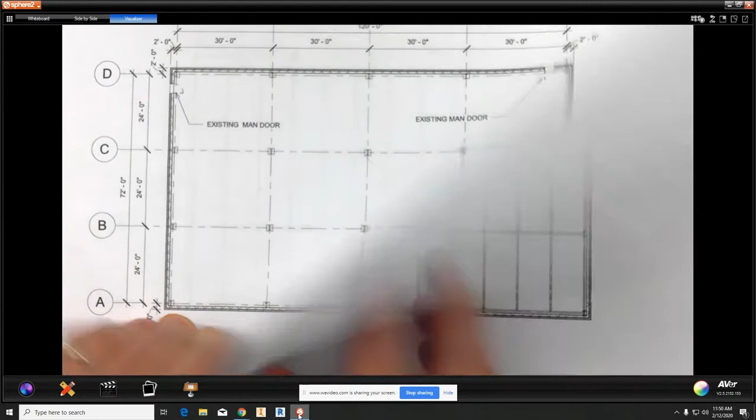We are going to start the process of doing our initial layout for our library right now. So I have two sheets of paper here. I have the first floor framing plan, first floor plan, and then I have the second floor plan. All right.

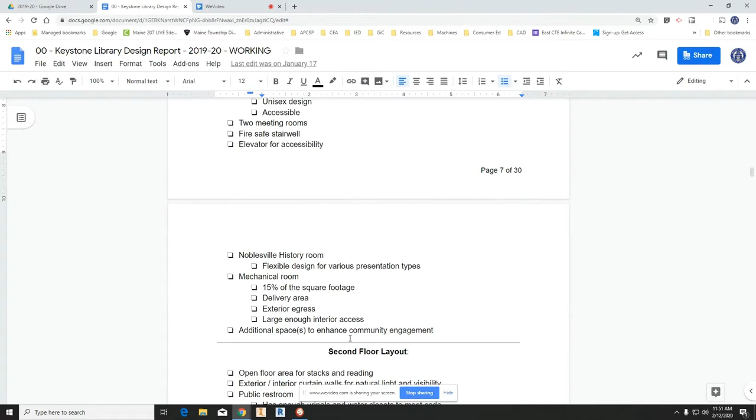So for the first floor, if you look at the requirements in the document that I gave to you, these are all the requirements that our first floor must have. Entry vestibule, main circulation desk, children help desk, exterior curtain walls, public area, public restrooms, library and office, so on and so forth, down to mechanical space and additional space for community engagement. All right, and the second floor also has some stuff here.

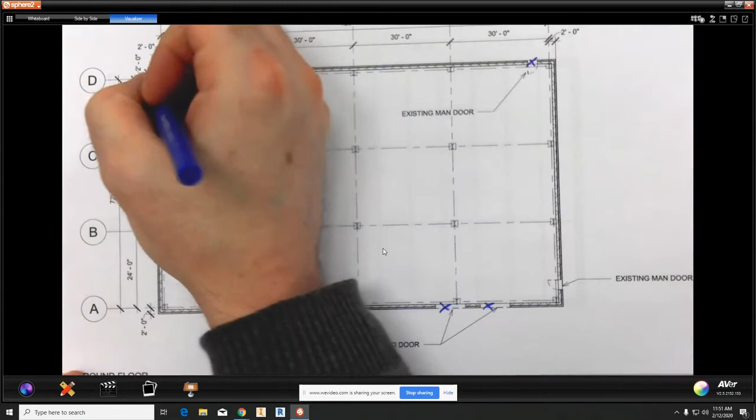So what I'm going to do is I'm going to sketch this out. So a few things that I've already designed with you: first of all, I'm getting rid of the existing doorways. I'm going to put in my own doorways. I put in an entry vestibule. I can't remember exactly where it is, but I'm going to kind of just sketch it out, maybe here-ish.

So that's my entry. The reason being is this is the south side of the building. Most of the sun, especially in the winter and when it's colder, is on the south side. So this is why my entryway is down here. I'm going to have a lot of glass along the east, south, and west sides. The north side, not as much. Another thing I've done so far, I made this area here my stair and elevator. Okay.

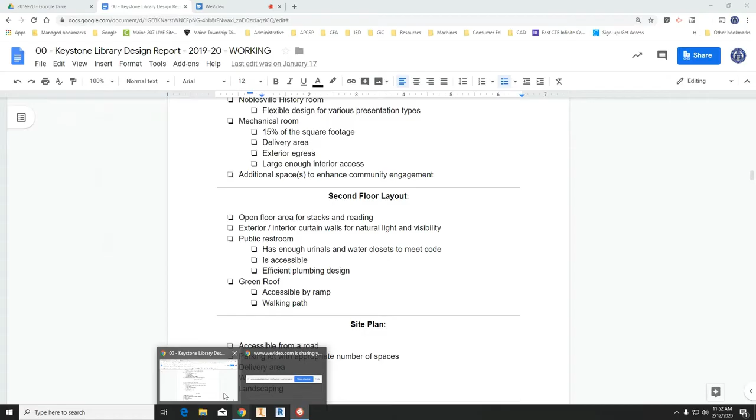After that, I'll split the screen so we can kind of see two things at once. So here, 15% of the overall square footage needs to be dedicated to the maintenance room, mechanical room. The overall square footage is 120 by 72. So 120 times 72 is 8,640. Remember, there's two floors, so times 2. We get 17,280 square feet. 15% of that is about 2,592. Let's say roughly 2,600 square feet.

If I divide that by 30, because that's kind of the length of one of these, it needs to be about 86 feet long. So if it's one of these wide, it needs to be 86 feet long. This is pretty excessive, but if I look up here at one of my requirements, it says multiply by 2 with a green roof. I'm not going to do that. I'm only going to multiply by 1.5 because I'm only going to take into consideration the second floor that's enclosed.

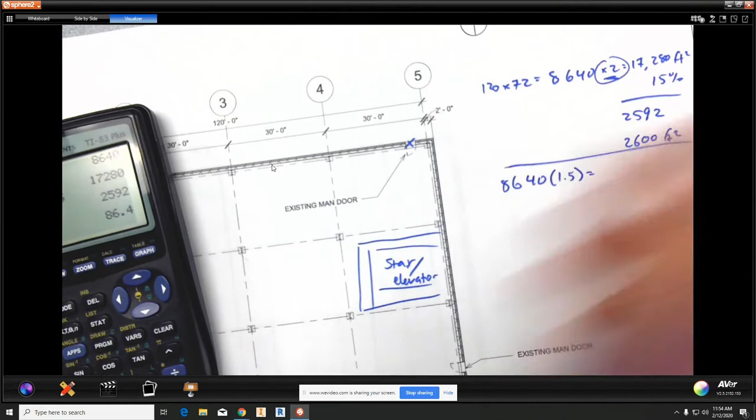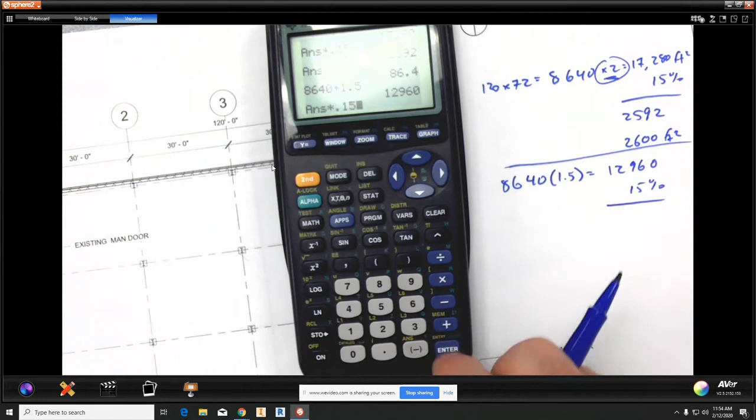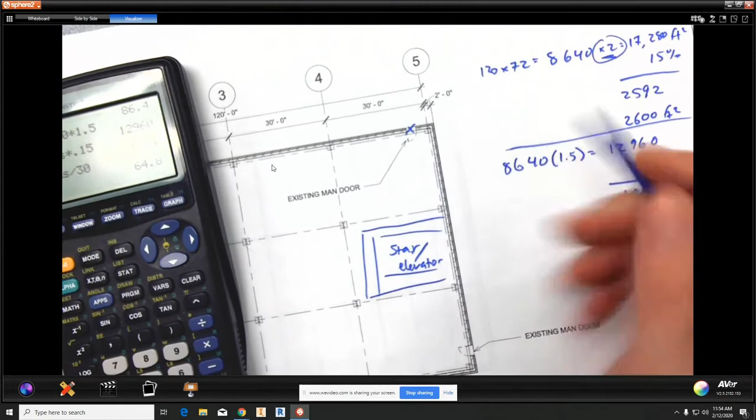So if I go back to the 8,640 times 1.5 this time, that's 12,960. Multiply that by 15%, I get roughly 1,900 square feet. So with 1,900, divide that by 30, and I roughly get about 64 feet. So this is still a pretty large mechanical room, maintenance room. I'll double check my numbers here. I did say 15%.

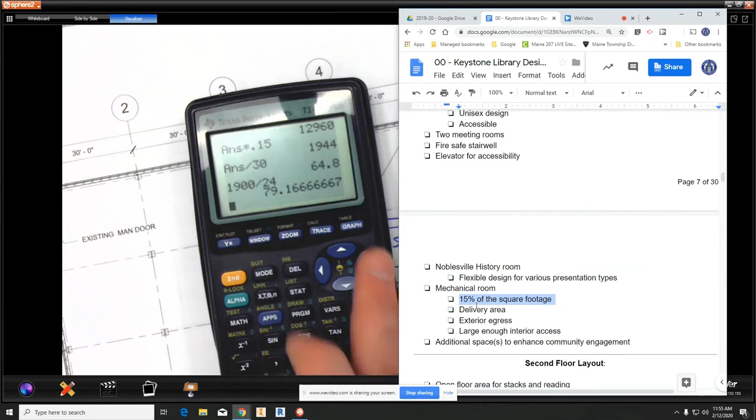And you do need a pretty large mechanical room. Let's do 1,900 divided by 24. Let's see how that works out. So that's 79. So I'm going to maybe cheat a little bit. I'm going to dedicate these 2 bays here to mechanical. And that way, in the back here, I can have a garage door and some walking doors. I'll put that over here because I'll have the parking lot around here. So entry door. And that way it's also next to my stairwell.

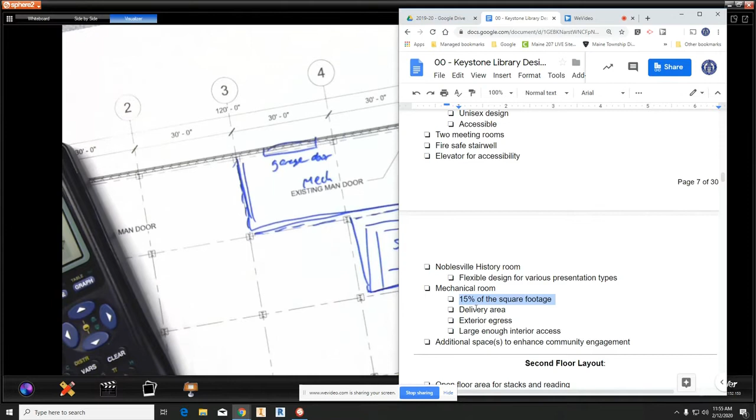So that's all. Let me go back here. So I'll roughly keep this upper corner here all for essentially mechanical and stuff like that. And from here, I'm going to start putting in my other spaces. So if I go back here, let's see. Entry, so the main circulation desk, I'm going to put that most likely right around this area. So this would be my circulation desk.

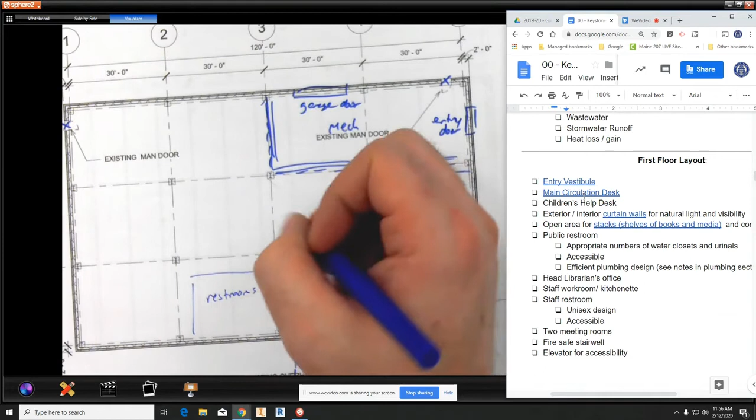Off to the left here of the entryway, that's where I think would be a good public restroom. I'm not really sure how big to size that just yet, but I'm going to roughly do something like this, and we're going to call that restrooms. Let's see, so flow of traffic: people come in here, circulation desk out here, kind of an open space. This would be maybe the shelf books / tables.

All right. Children's help desk. Not sure if I want that on the other side of the restroom, or maybe back here is what I'm thinking. So we'll put the children's area back here.

Again, this is all just rough sketching out. Let's see. So the open area maybe could be in front here. So let's kind of dedicate this to open area. And then the west side, the left side here, is where I'm going to have a lot of my meeting rooms and

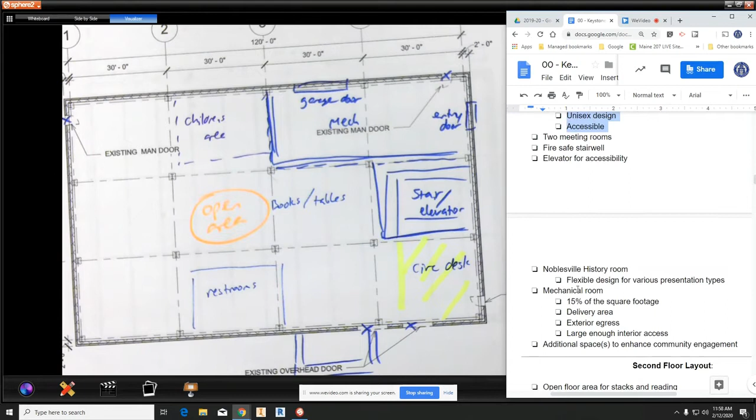so let's see, things I haven't done yet. I've done that. Open area, public restroom, I've done that. So librarian's office, staff workroom, kitchenette. I kind of want this all to be in the same place. We need some meeting rooms, history room. So that's kind of all I need left, and I've got a decent amount of space here.

So I'm thinking we'll put the office space here. So I'll dedicate maybe this whole bay here to staff area and head librarian area. Okay. And then let's see, maybe this bay here would be the history room. And then let's see, what else do I need?

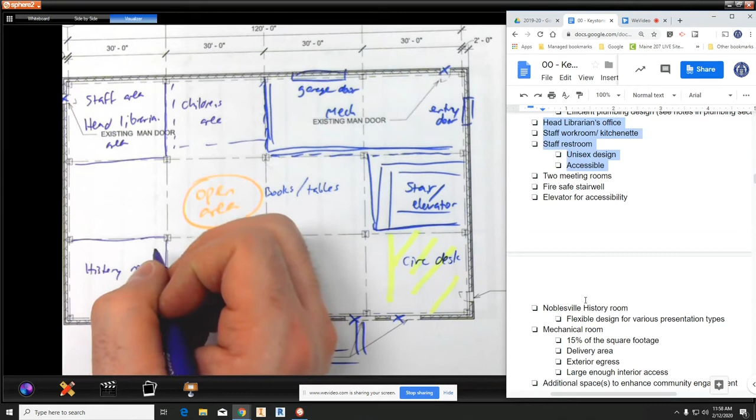So I've got meeting rooms and additional space for community engagement. So yeah, maybe meeting rooms. And maybe I can somehow incorporate, along with this open area, possibly flex type space. So maybe a place where there could be displays set up, similar to the history room, but maybe like a maker space or something to draw the community in. All right, so that would be my first floor, and then going up to the second floor.

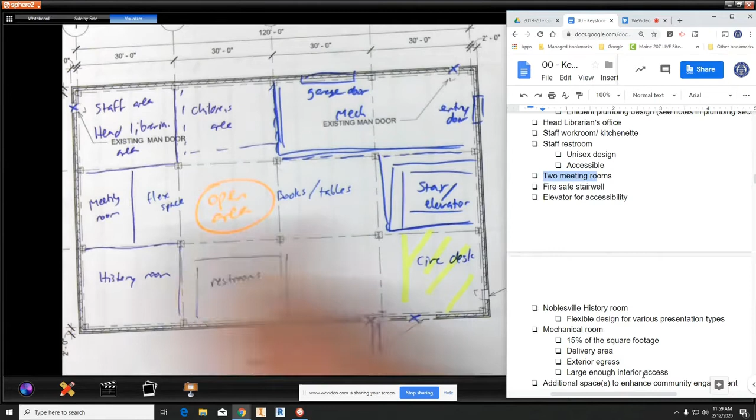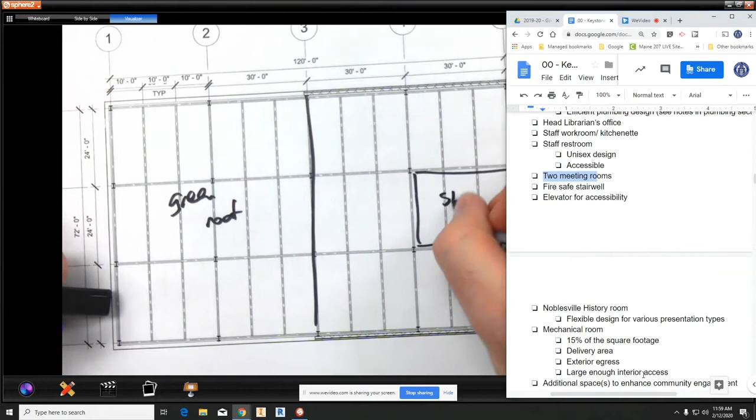So if you're looking at the second floor, right away you can just grab another marker here, kind of chop this off here. This is green roof. To connect this part down to the bottom, this is your stairwell, an elevator. All right. And so once you walk out here, it's useful and economical to have the plumbing from the first floor and second floor be in the same place. So it might be good to have this as a restroom area.

Keep most of this area here. As soon as you walk out of the stairwell, open, and then stacks of books and tables. Let's see, what else do we need on the second floor? So open area, exit. Don't forget you're going to need entrances or ways to get to the green roof. So you're going to need doors, maybe one there and there. Green roof access, that's what that is.

Public restroom. And then these two areas here, relatively secluded. Maybe you could have additional. There's extra flexibility here. You have study area maybe, or private meeting rooms, so more meeting spaces or study areas, like a multimedia place, or again places that are flexible to try to draw more of the community in.

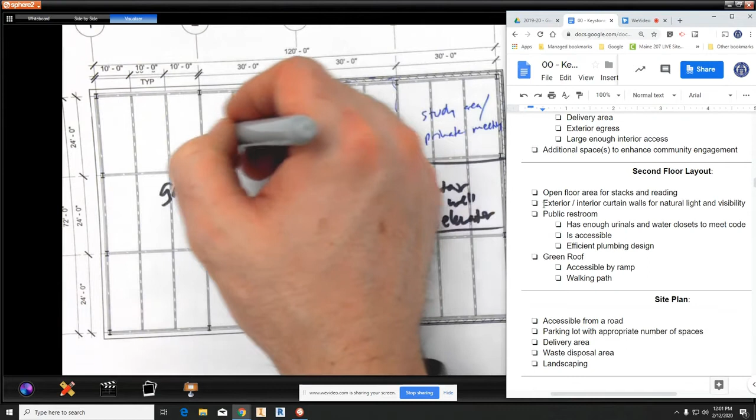All right, so that's kind of how I would start the process of sketching out what my area is going to be, and then another thing you can do is maybe start thinking about how you want your walking path to be. So if your doors are here, your walking path could meander. I'm not sure if I did that right. Yeah, and so that could be a walking path, benches, trees, and bushes.

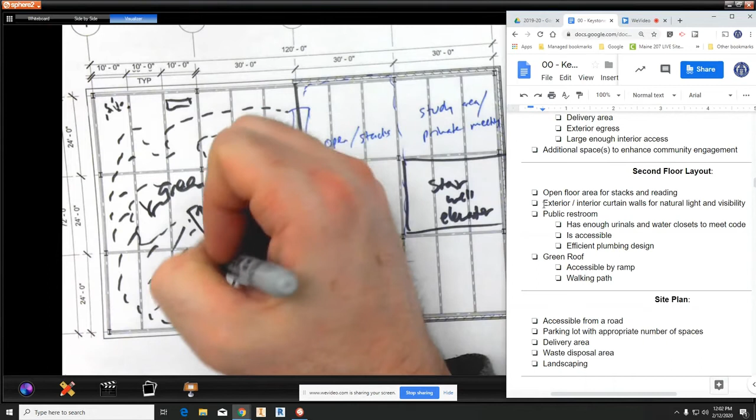But you kind of want to just think through what you're going to want, like a bench here at the end of a little area, and then just trees, bushes, things to draw people into the space. All right, so it's a good start. After this, we're going to switch over to Revit, start sketching out with interior walls, and see how it goes from there.

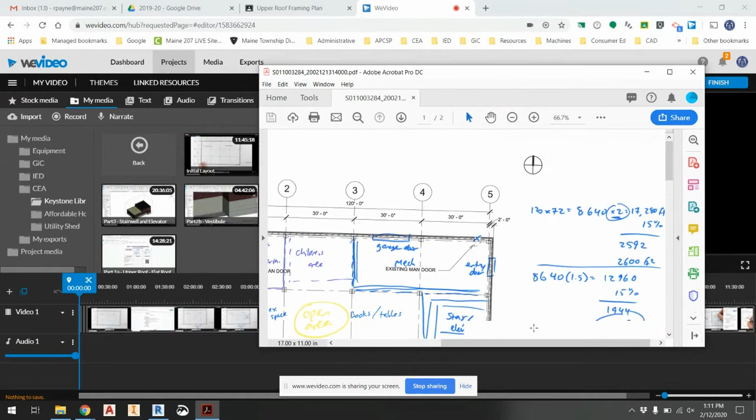Here's the sketch we just did for the first floor. Here's the sketch for the second floor. Now we're going to start the process of putting this into Revit. So I'm going to push this off to the side of my screen, maybe zoom in a little bit. All right, so zoom in here and go to Revit.

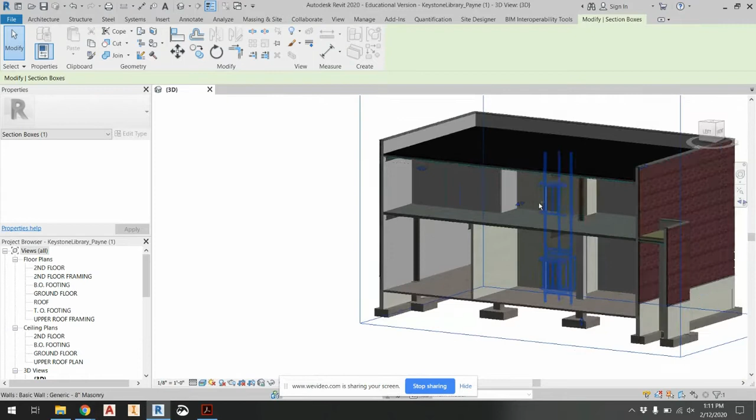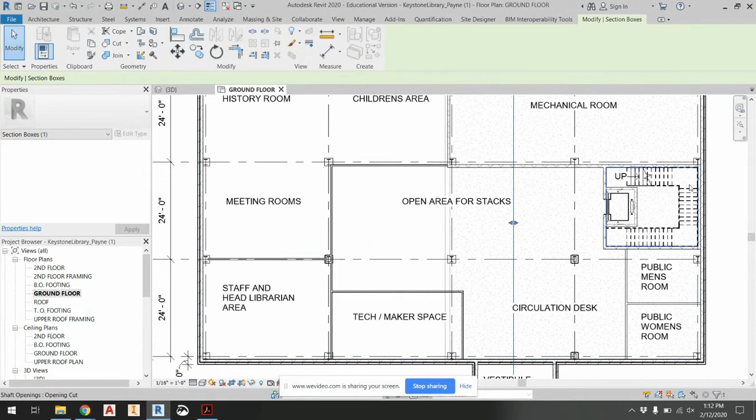So far with Revit, I put in my entry vestibule, my upper roof, my green roof, my second floor, and then if I cut back in here and pan around, I've started putting in my elevator, my stairs, and you'll see that I've even put in some stuff for my layout. So if I go to the ground floor plan, you see I've got some stuff already sketched out here. So looks like I was doing some stuff earlier.

I put my restrooms over here. It's different than what I just did. So it's really up to you. There are many different types of layouts that are possible. So here's one layout. Here's a different layout. Just trying to show you that there's different layouts that are possible. So I've essentially gone through two separate layouts with you. I'm going to go further with this one here. So I'm going to clear out the existing one that I've done here. So I'm going to delete a bunch of this stuff.

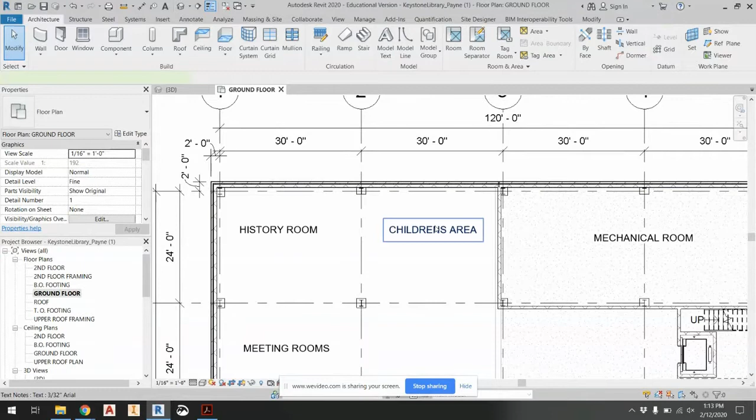The mechanical room, I think, actually lines up in the same place. Yep, mechanical room is in the same place. So I'm going to leave that. But a lot of this text is going to change. That stays. Oh, that's actually the same thing. That's different. And then that gets moved up to here.

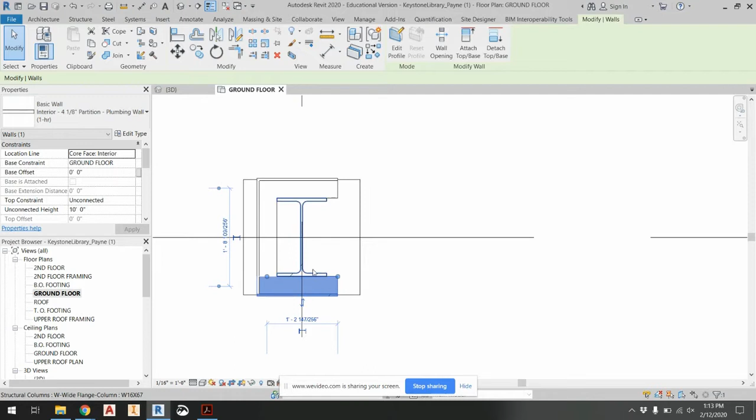All right, so one thing I need to do, I need to continue the process of wrapping my columns. So here, remember, that's my plumbing wall. The reason there's no drywall on one side, but I don't need drywall on the other side for wrapping my columns. So if I go back and double check this, currently they're unconnected 10-foot high. So something I may not have done initially is I didn't check the elevation of my second floor.

So what I mean by that is if you cut a section through here, so if I go to, no, I don't need to do that. I can just go right here. This button appears as a section, cut a section through here, and then go down to my sections right here. Check it out. You see my second floor is 19 feet 6 inches high. That's the bottom of my second floor. And here's the bottom of what's called a beam.

All right, so if I were to check this out and get an idea for this, I could put in a measurement from the top of the floor to the bottom of the beam. It's 18 foot 6 inches. So my wall should probably be more than 10 feet high. You want to have enough room for all the ventilation, heating, cooling, HVAC work, any kind of duct, plumbing, anything like that. So you might want to drop the ceiling maybe 3 or 4 feet. That would give plenty of space.

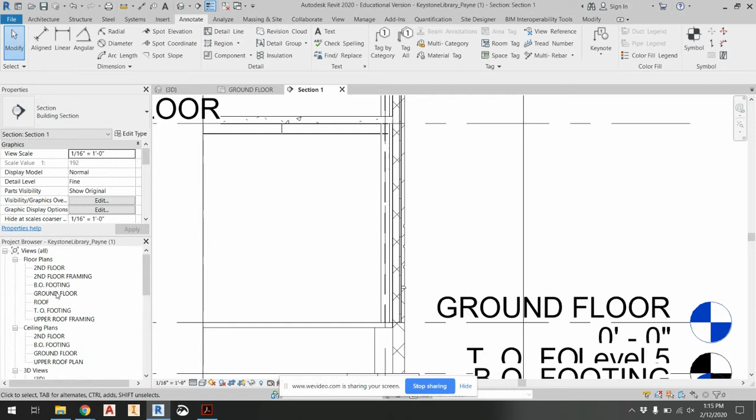But what I'm saying is, okay, 18 foot 6 inches minus 4 feet, that's about 14 feet. So my walls need to be at least 14 or 15 feet high. All right. So if I go back to my ground floor plan, I can remove this section. That was just a temporary thing. But all of these walls, this wall here, right now it says unconnected 19 feet 6 inches. Well, actually, no, it is top constraint, second floor.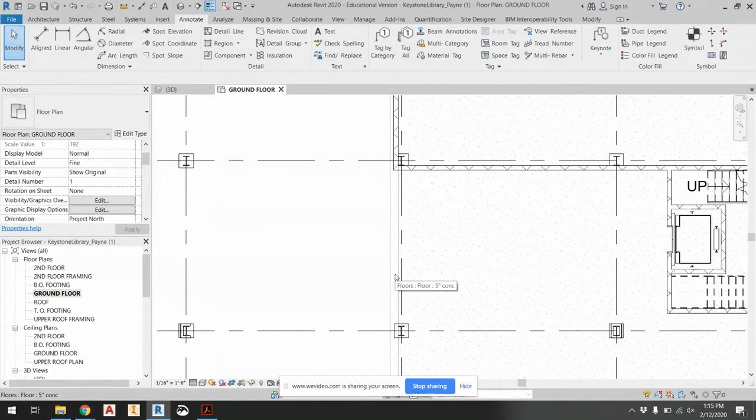That maybe for the mechanical room, that's good. I'm kind of debating back and forth right now how I want to do this. But it's not what I want to do for all my walls. Mechanical room might be a little bit different, might be separate. So I'll leave that for the mechanical room, but all my other walls, I'm going to want them to be a bit taller. So for example, right here, I don't want them to be connected because the concept is if you have walls going all the way up to the second floor, you're going to have to cut through them to put all the HVAC. So you don't want to do that.

You want to leave them low enough that the contractors who are working on the HVAC don't have to cut through your walls, but high enough to reach the ceiling and separate the spaces. So I'm going to unconnect them and make them, let's say, 14 feet. All right, hit apply. And so I'm going to do that with all of these walls. Make them unconnected, 14 feet tall. All right. Let's see if I need to go to anything else.

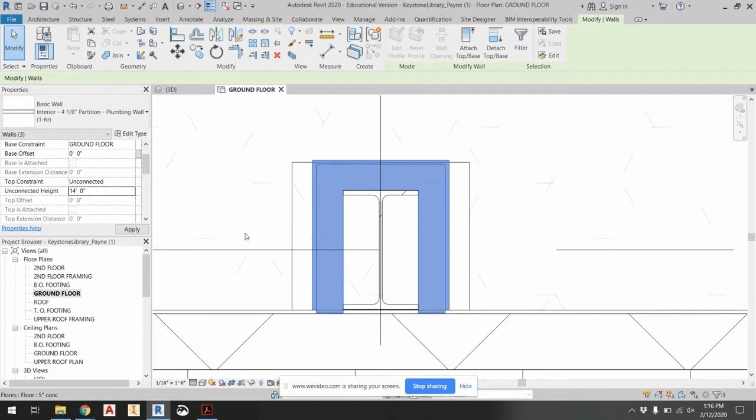These walls definitely go all the way up because that's the shaft. That's the fire safe shaft. Let's see. Whoops. A little too much there. So here, here, here. Those should be unconnected, 14 feet. Let's see, where else do I need to go? I think these are already unconnected. Yep. But instead of 10 feet, make 14 feet. All right, that should be it.

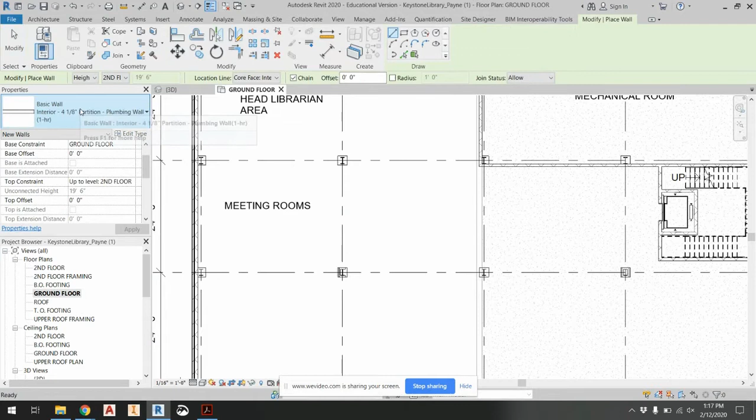So if I go back to the architecture tab, wall, basic wall, plumbing wall, that's good. So I can just connect that to that. That should all connect. And I can just continue wrapping the rest of my columns. So from here around. Oops, undo, undo. I forgot. So I'm just jumping into it. I want it to be unconnected, 14 foot high. All right, that's the whole purpose of what I just did.

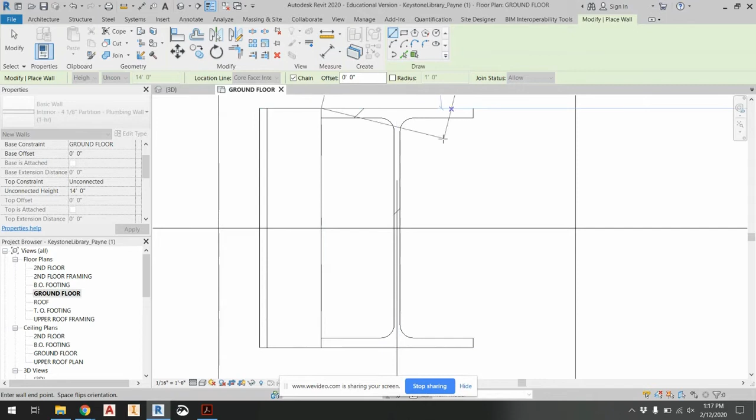Unconnected, 14 foot high. And I'm connecting it to the corners, the outside corners here of the beams. All right, wrap that column. Let's see. Wrap this column.

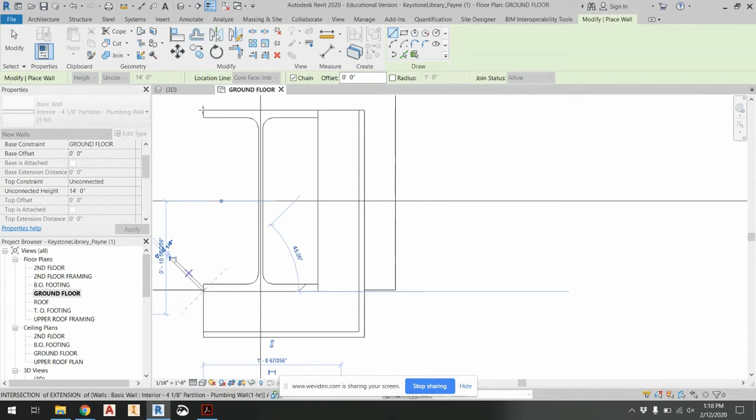All right, so for these outside walls, since they don't really connect here, the best thing to do after you make it like the way I did, you can use an align command. So I want to align it to here. Same thing here. All right, so I'm not going to go through every single column right now. You can work on that yourself.

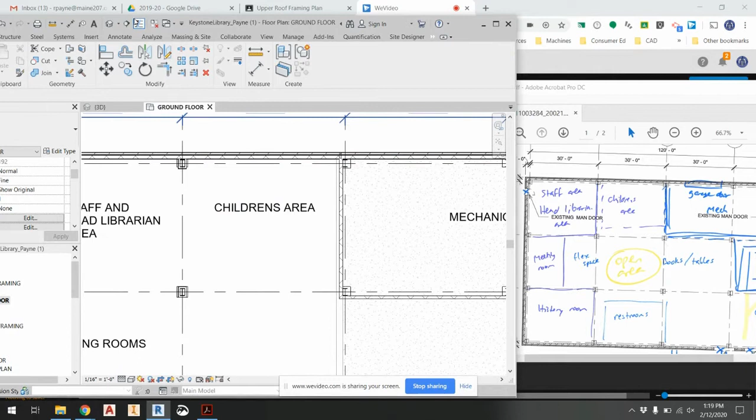But what I'm going to do now is I'm going to put in wall dividers for the stuff that I wanted here. So I'm going to push this off to the side, make this a little bit smaller so I can still see it. So, yep, I have the same children's work area. I don't want it to be the full depth here. So, oops, got rid of too much. I need to be able to see all my stuff here, all my menus.

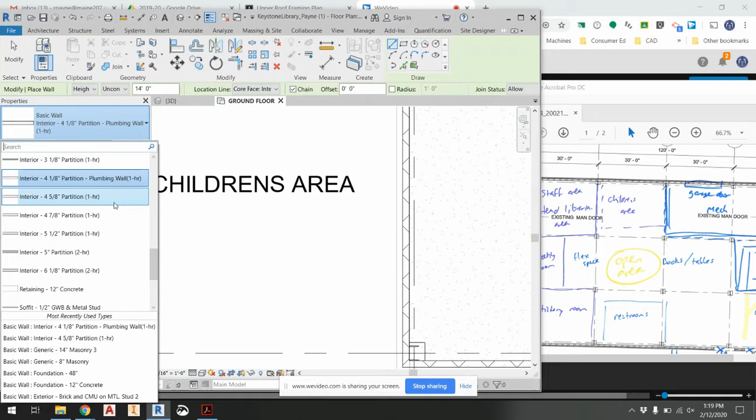All right, so I want to go to architecture, wall. This wall is just going to extend. Oh, I need to go back to a regular partition wall. Interior, 4 5/8. There we go. Drywall on both sides. I'm gonna bring that to about here.

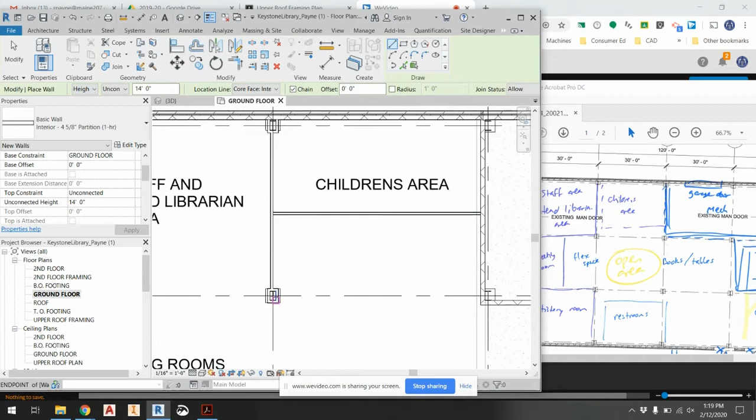From here on over, this is gonna be my staff area. So a combination of, let's see, my head librarian, their office. So if I think about this, I want the head librarian's office to be kind of facing towards the outside. So I'm going to sketch this out. Let's see, still that core face. I'm going to do core center line, kind of center all this stuff. So I'm going to kind of wall off here

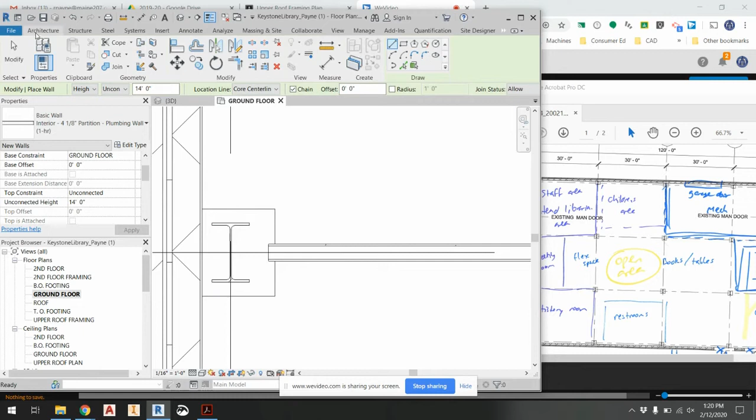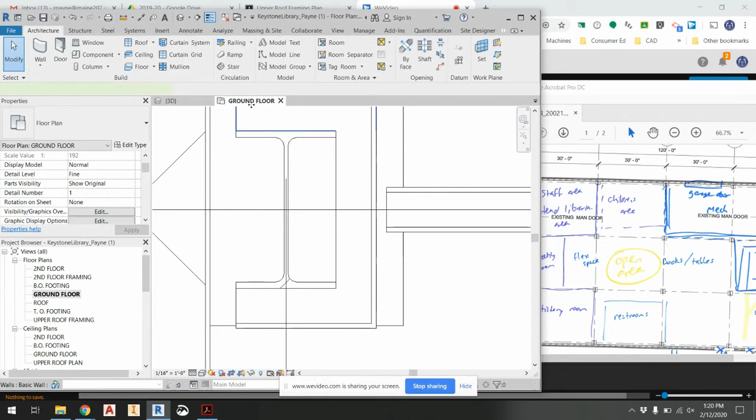all together. Oh yes, I'm going to need to wrap this column here. So I haven't done that. I'll do that later. I'm actually going to do it right now because I'm going to use that. So go back to my plumbing wall. Let's wrap this. So let's see, core face interior is where I'm lining this one up. Here. Here, and then use the align command, align that,

and then align that. All right, so the point is, what I wanted to do is my head librarian's office, so architecture wall, go back to a regular partition wall, is going to be kind of in this area. And then this area here is going to be the staff workroom, kitchenette, and staff bathroom kind of behind it. But then the head librarian's going to have a separate entrance either on this side or this side. I haven't decided yet.

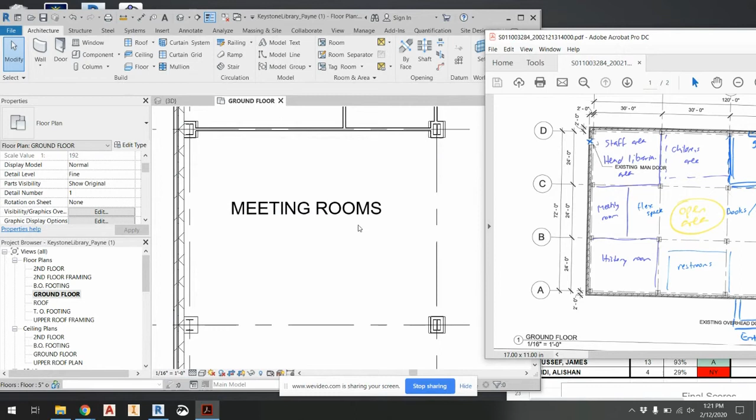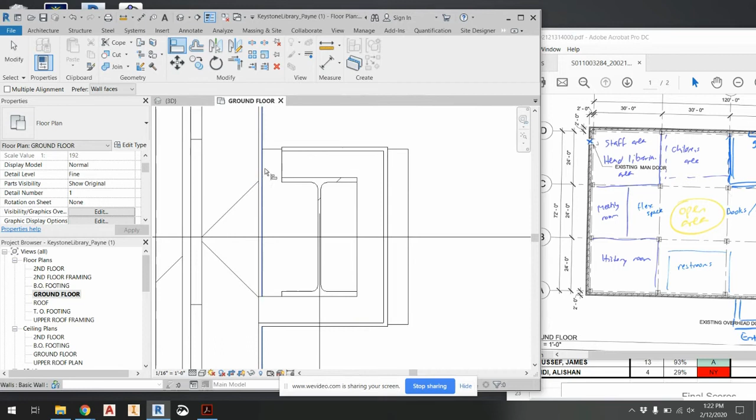All right. Let's see. So I need to do, oops, wrong one. Also wrong one. This one here. Okay. My meeting room is my history room. Okay. So I'm going to need to go back and wrap this column here because I'm going to use this column as an important point of reference here and here. Align that. Align that. All right. And my history room, Noblesville history room.

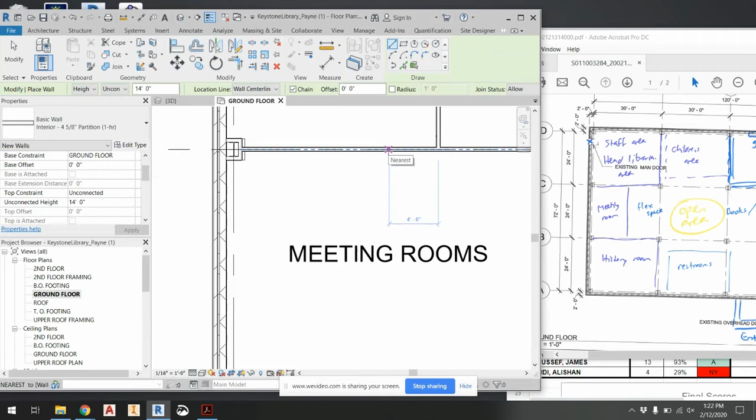Let's see. Switch back to normal wall. This will be a relatively large room. We'll see how it works. Let's see, wall center line. It's gonna go right down the middle here. Okay. And then for my meeting rooms, they're gonna need a big enough space here. Let's see, 4'6". So that'd be enough for a doorway there.

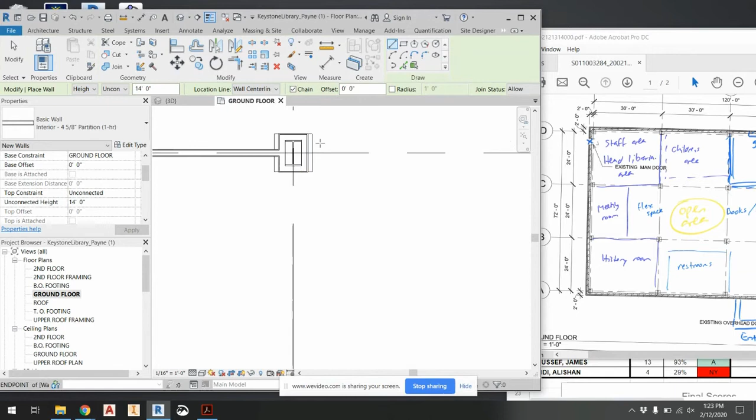So if that makes sense, what I just did, I made sure that this space is big enough to have a doorway to enter for the staff area. So these would be a couple meeting rooms, at least two, maybe three. This would be a large enough space for a history room between this column here. I still need to wall off this area here. So I need to wrap that column. And then I need my bathrooms.

So I'm going to totally wrap this column and then have like a women's room up here, men's room here. That way they're at the entrance. Right as you walk in, you'll have the bathrooms on your left-hand side. And then this will be my kind of circulation area back here, open area for books, and kind of a flex space here where everyone's going to be available. I think that would be a good one.

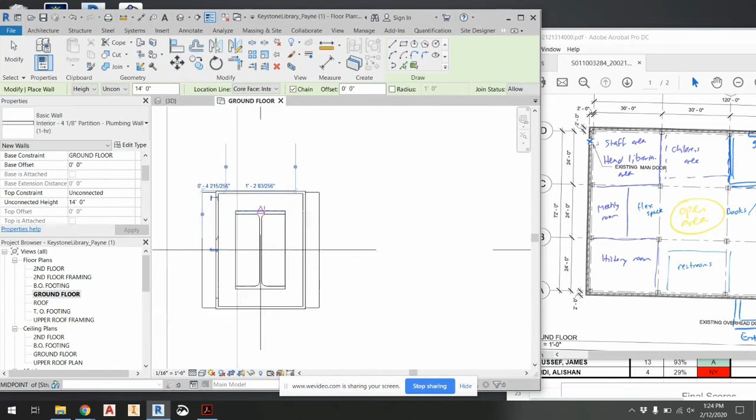All right, so I'm just going to wall off this area here. So I still need to go back, wrap my column here. Let's go ahead and do that. Again, wrapping your columns with that center line, I need to do core face interior. Wrapping your columns is not a requirement. I think it just looks better with having your spaces divided up. All right. Then I'm going to want to wrap this column down here.

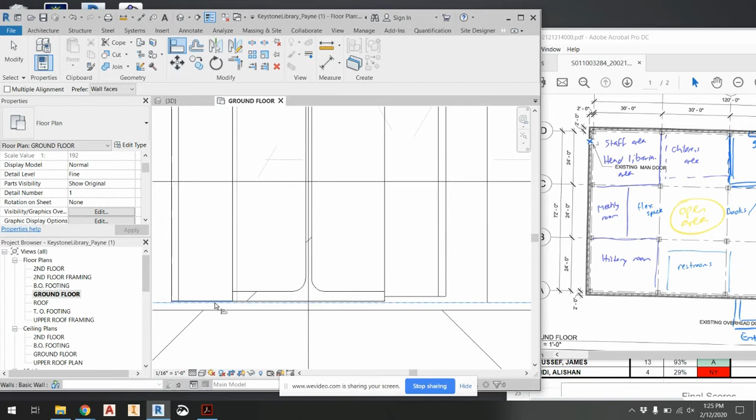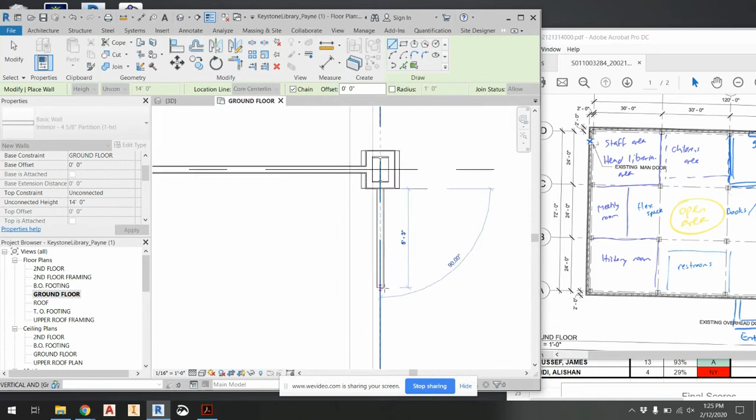All right, and then I can align to this surface, that, again to this surface, that. All right. And wall off the bathroom area. So again, wall, go back to this wall. Want to go core centerline. And then one more. Let's see, right here. And then, let's see, that's space 24, that's space 30.

So if I want to have kind of longer, narrower bathrooms, I could have them running this way. If I want to have shorter but wider bathrooms, I could run them this way. Yeah, I think I'd rather have shorter but wider. And so let's go to architecture. Here I definitely want my plumbing walls. So I can worry about spacing them later.

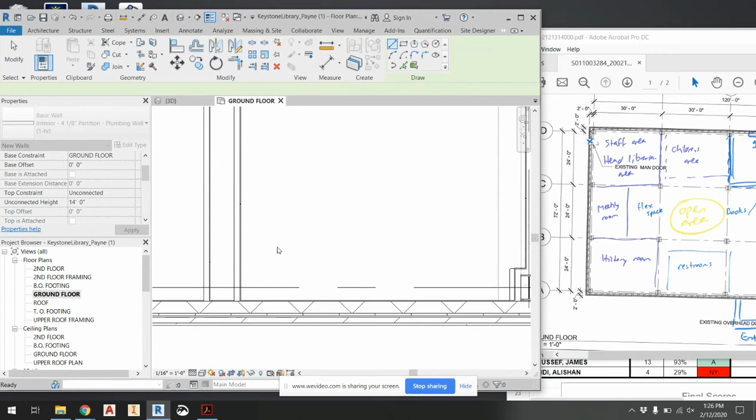If I zoom in, I have this one backwards at the moment. The way I can tell is I'm going to want my drywall. Anyway, let me just kind of finish this out and then I'll explain what I'm doing here. All right. And so the way I can reverse it, just like next here. So now I have drywall on this side, drywall on this side with a gap in here.

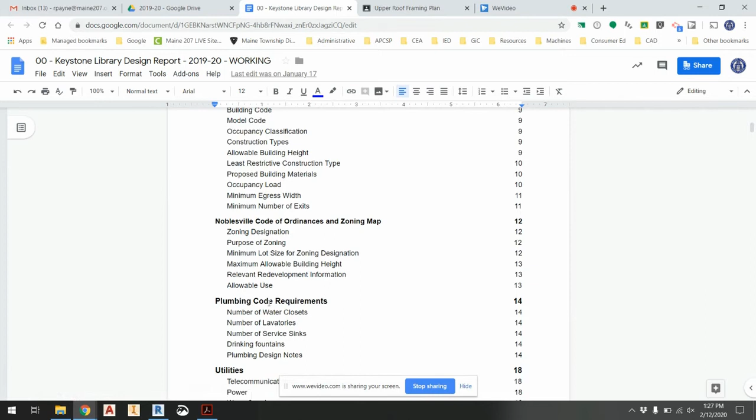And if you go back to the report, let's see, where would the report be? Let's see, here we go. And we go to the section of the report that has to do with plumbing. Plumbing, water closets. So let's go to plumbing code requirements. So this gives you the space here. At a minimum, if I have gypsum wallboard on metal stud, I need to have 11 inches between the back ends of the studs.

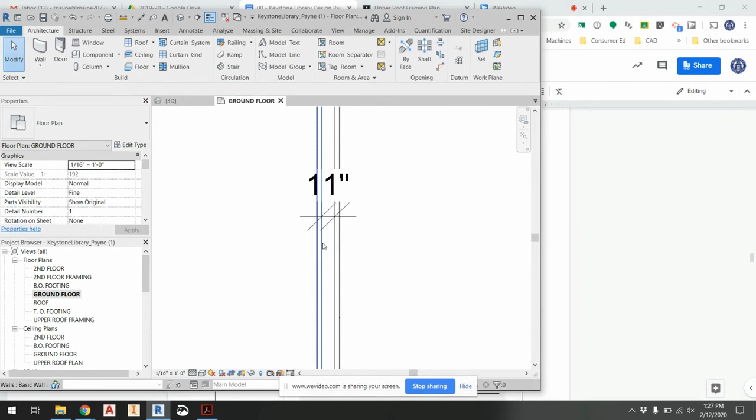So I can go back here and I know that this distance to this distance has to be 11 inches. I've got more than I need right now. But I could click on this and say that needs to be 11 inches, and I could bring that in. So that's the minimum spacing, and that's a very efficient wall design. And then if I wanted to lock this in, click on this, lock that in. So that way, if I wanted to drag this over, both walls travel together, depending on how I want to allocate the space here for men's and women's bathroom.

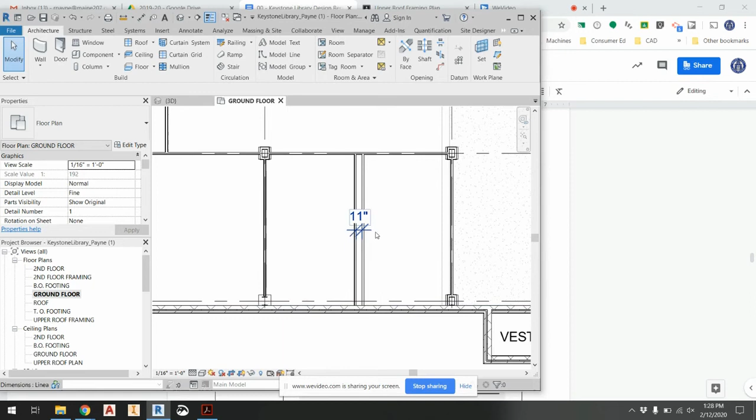This way I have enough space in here for all the plumbing requirements behind the toilets. Also, this is really good for a plumber because they have to put in a minimal amount of plumbing, right? If the toilets didn't back up to each other, then there's plumbing for one wall, plumbing for a separate wall. There's a lot of extra piping, a lot of extra work, a lot of extra expense. This is just about as efficient as it can get. All right, there will be a separate plumbing run because back here I'm going to have another bathroom for the staff, kitchenette and the staff bathroom. But they're at least somewhat close in the same section of the building.

Where I have this right now, since this is the green roof, I can't have my second floor bathroom directly on top of it. So it's not going to be the most efficient possible, but they'll be in the same general vicinity. So I think if I go to my second floor, I'll have my bathroom right around here. Pretty close. I could, if I really wanted to, move this whole thing over here and dedicate this whole area to being a bathroom area. Not really a bad idea. And that way I could actually put my second floor bathroom directly on top of my first floor bathroom. So I'm going to keep that in mind, for good design and affordable design, it's definitely something that a lot of people will do.

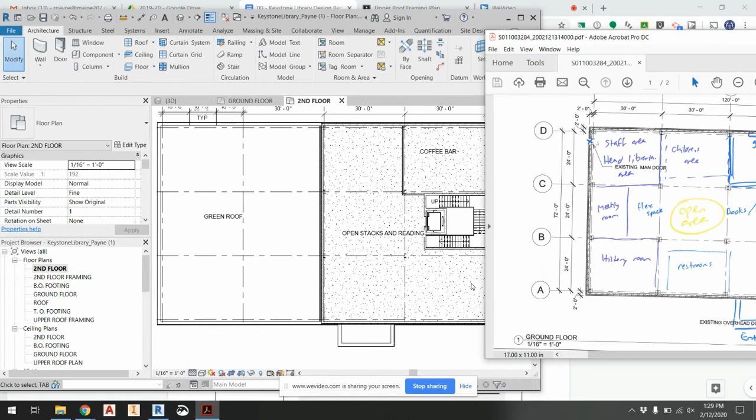All right, so now I'm going to go to my second floor and sketch that out. All right, you can see this is what I had before. Had a coffee bar, restrooms. So to keep up with my new design, or my second design, if I go to my second floor here, remember my green roof is still the same place, but I had my restrooms being here this time, and then this being open for tables, this being a study area. I can keep that as a study area or change it to a coffee bar.

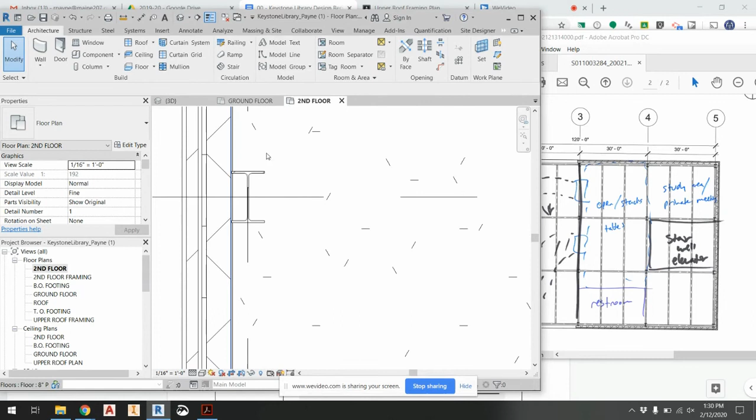So again, I'm going to wrap these columns real quick. So put in a wall, plumbing wall, wrap these columns. Whoops, not down the center line. Let's see, core face, interior.

I think I missed the, yep, I missed it. All right, let's try that again. All right, so, another thing I need to check is how high these walls should be. So these probably will not be the same 14-foot high walls. Let's put in a section real quick. Let's go check that section out.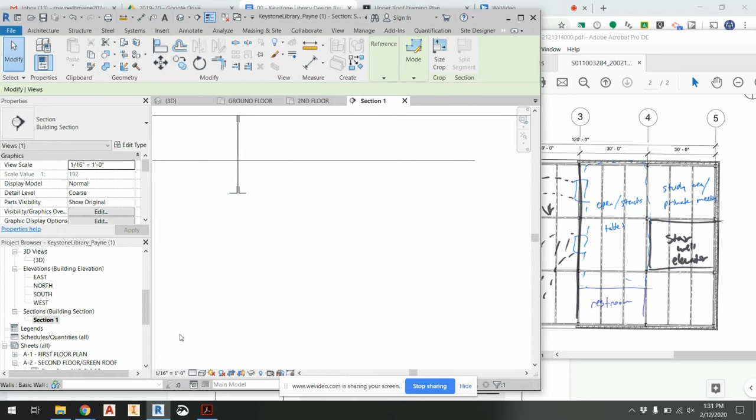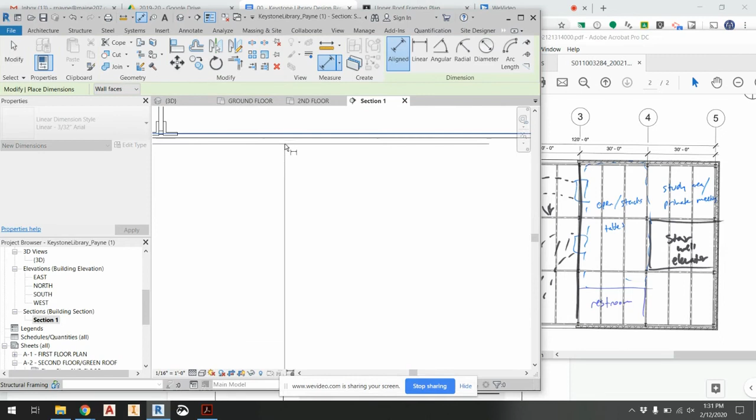So let's see. The bottom of my framing is right there. Let's turn it to that. From the top of my floor to the bottom of my framing, currently I have about 13 feet 2 inches. So my 14 foot would go too high. So again, drop about 3 or 4 feet. That would leave about 9 foot ceilings in the second floor. So let's do that. Let's make 9 foot ceilings.

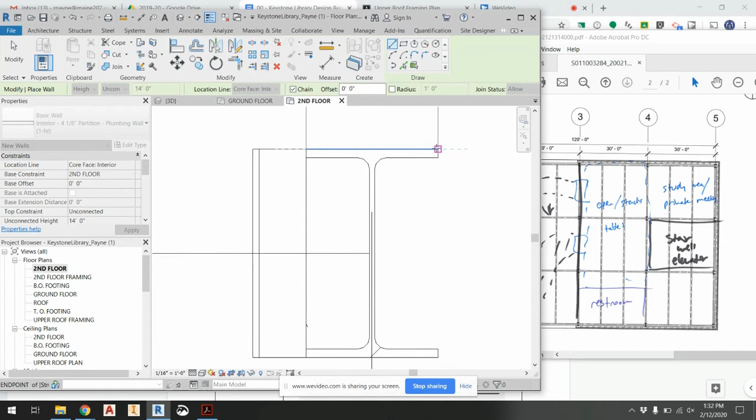All right. So go to second floor. Delete this now. Okay. And so wall, plumbing walls, if I wrap a column here, I'm going to wrap this column in the middle just so I can kind of show you something. All right, wrapping this column, almost done. Oops, and I didn't, of course, change it like I said I was going to. I went through the whole process and forgot to change it. So these should all have been 9 foot walls. All right, hit apply. And then I'm going to go to 3D view real quick to show something.

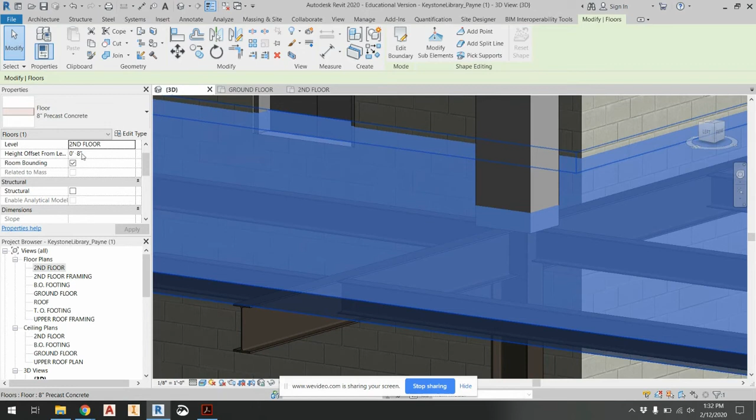All right, so go to this wall. You see how part of my wall is under the floor. I think I went over this earlier, but the idea is that this level right here is my second floor. The way Revit set it up, this is the elevation that's my floor. And remember, I put a 4 or 8 inch. Let's take a look. I put an 8 inch. I did the hollow core concrete. I did an 8 inch floor on top of that. So I need to vertically offset all my walls 8 inches. The base offset needs to be 8 inches.

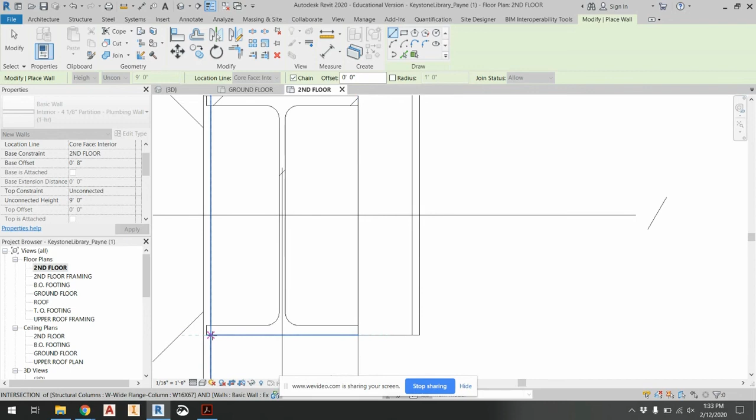All right. So if I go back to second floor, all of these, the base offset needs to be 8 inches. All right, hit apply. So it's important to think before you just start putting in walls. Otherwise, you have to go back a lot. So wall, this time I'll think through it. Base offset, 8 inches. Height is 9 feet. And there we go. So that'll give me, like I said, about 3 or 4 feet worth of area or height to put my HVAC in above my second floor.

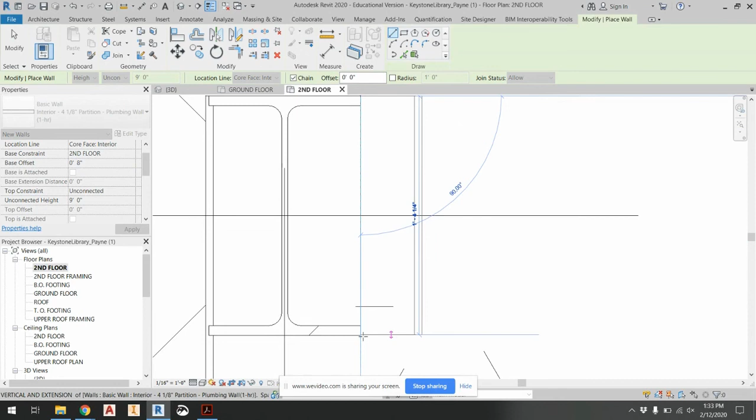All right. So you can wrap these. Again, if you choose to wrap these, it's certainly not a requirement. Not for this kind of building. Okay. And so let's see, wrap one more over here. Can leave that one in the corner open. And then I'll wall this off. And once I set it once, all my future walls will maintain the 8-inch offset, 9-foot unconnected height. I switch back to core face or wall center line.

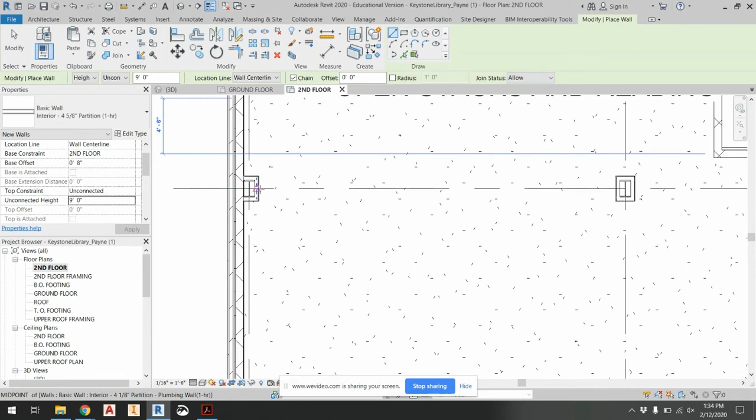Okay, so go from here to here, and then here to here, and then go back, switch back to my plumbing wall. I'll do the same thing as before. Hit spacebar to reverse that wall initially, right there. Spacebar again to put it that way. And then I can put in my spacing, make it 11 inches.

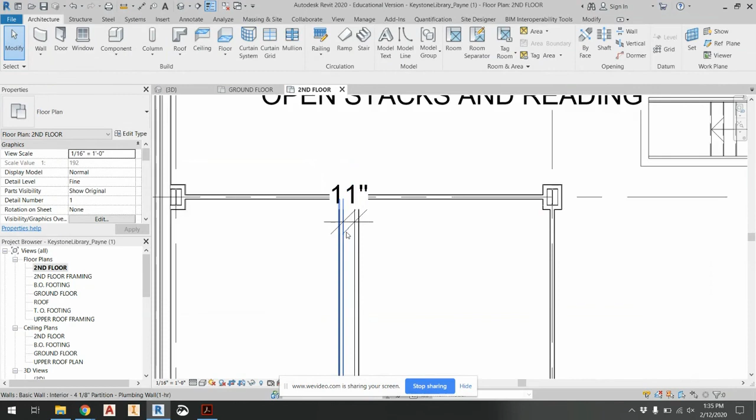This time it is wrong. Oops. Select this wall. So it needs to be 11 inches. And then I can click on the dimension and lock it. All right. So that's the way to put in just your dividing walls and spaces.

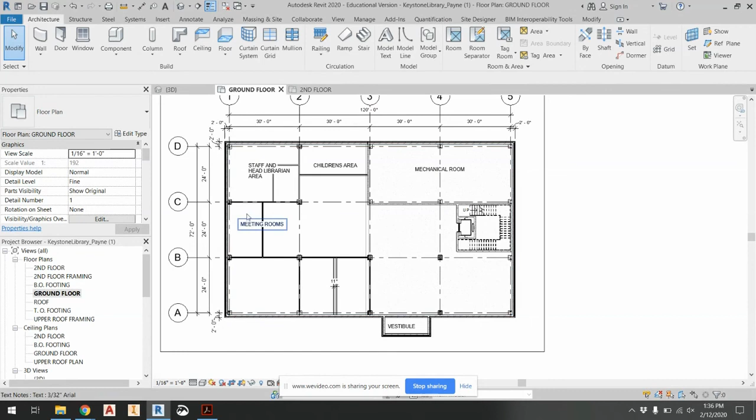Next, what we're going to do is we're going to change these to curtain walls, show what that looks like. So some of our walls, not all of them, are going to be curtain walls with a lot of glass so that you can see through them because we want open, airy kind of stuff. Obviously can't do that for the mechanical room, definitely not for the bathrooms, but you can have a lot of other interior walls. So like the Noblesville History Room, your meeting rooms, parts of your staff room, your children's area.

You might not even need wall for your children's area. You might not even want that walled off, or maybe you only want it partially walled off. And then like your circulation desk area doesn't need it. Some stuff does not need to be walled off. Others do need to be walled off. Others can have big glass walls. Kind of depends on how you want it to all look, and that's what we're going to work on next. All right, but this is the basis of how to put in your layout.

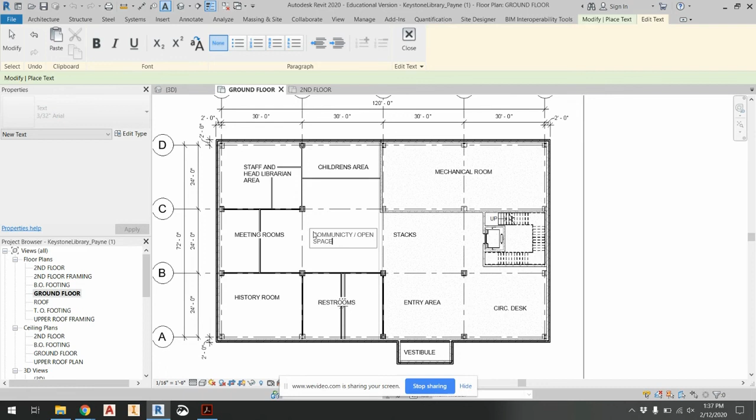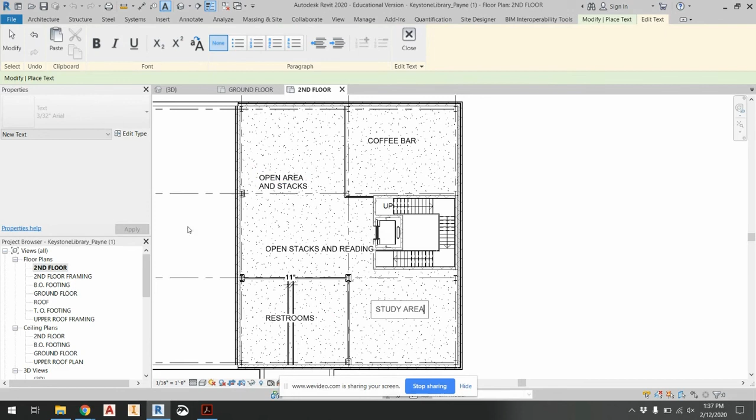Oh, by the way, it's always useful just to name your spaces: history room, restrooms, circulation desk, entry area, stacks, community / open space. Go to the second floor: restrooms, open area, and stacks. Maybe this will be my study area. And then that's still my green roof. All right. So good start at this point, and we'll start cleaning up the details next.